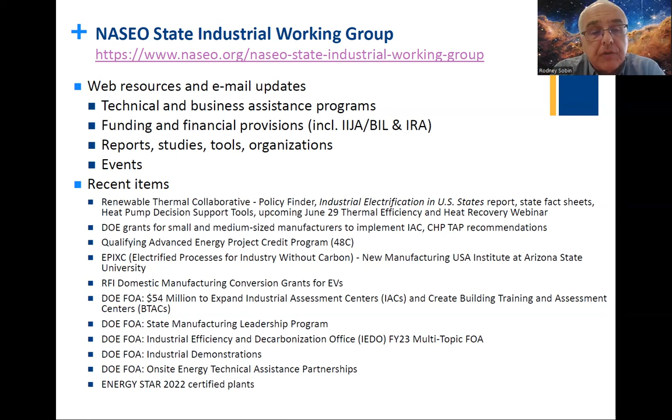Next slide, please. So we do run forums and webinars. This is a public webinar that you're welcome to. We also have state-only forums.

Past ones have included one where we focused on Connecticut's manufacturing ecosystem, as well as having DOE presentations on the Advanced Energy Manufacturing Grant Program and the Industrial Demonstrations Program.

Just last month, we had a focus on industrial assessment centers and some related DOE-supported technical assistance. We're very pleased to note that next month we will have a forum featuring the NIST Manufacturing Extension Partnership and EPA's Energy Star Industrial Program.

And you'll see there some candidate future topics, including IRA tax credits, DOE's industrial decarbonization roadmap, the DOE heat shot, and some other laws, including CHIPS and Science Act provisions which are pertinent to manufacturing. We also hope to have state focus in each of our forums, and will be working to identify state case studies, experiences, and lessons. Let me then hand this over to Blaine Collison to start off the main part of the program.

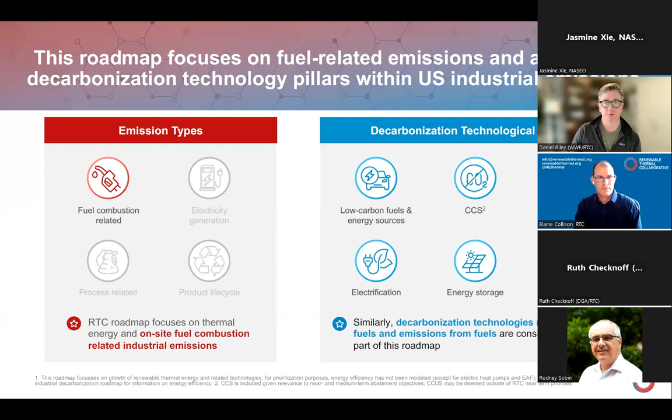In terms of the different decarbonization technology pillars: energy efficiency, hugely important, but we left it out just to simplify the modeling in terms of uptake. So you can always consider the effects of energy efficiency as you think about how strategy could be enhanced when you consider the results we show you. But we did include CCS, of course, energy storage, electrification as a strategy for scope 1, and then low carbon fuels and energy sources. Next slide.

So why are we doing this, and why is this important? I think we all know this. Industry here is 24% of total emissions in the US, with half of that coming from thermal. As you can see, there's progress, particularly expected in power generation. Transportation is growing rapidly and we're seeing a lot of work being done, but not a lot of progress in industry. You can see the uptick there. In fact, some global projections have industry by 2030 projected to be the number one source of emissions in these sector cuts. If you include the use of electricity by industry, it very quickly goes to number one globally and in the United States as well. So it's a critical part of the equation, and of course, why, as Blaine mentioned, the RTC is here.

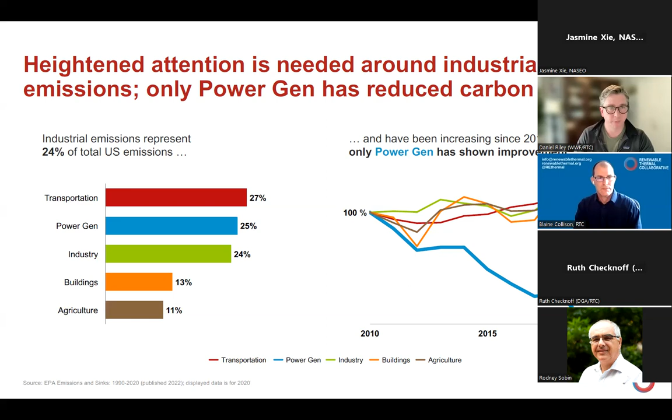Next slide. So what did we find? The first thing we had to do was understand the problem a little better. So we took a look in the US at where the industrial thermal emissions are coming from. And what we found is that the top 6 sectors are refineries, chemicals, iron and steel, food, paper, and cement. And then there's a long tail, and an even longer tail clustered together, all other manufacturing there at the end.

That box of 111, that's the unreported biogenic emissions. Those are typically accounted for as carbon neutral, but because they're biogenic, it's still a huge amount of emissions within that sector. So in the report, we offer further insights into ways of reducing those emissions, because of course they still go into the atmosphere. There are some strategies for reducing those beyond just accounting them as carbon neutral.

One of the ideas we had as we approached this is that when folks think about industrial thermal emissions, something that quickly comes to mind is the iron and steel sector - the molten orange and red metal being rolled out, and the very high heat that goes into that. In fact, that is a key source of emissions in the sector, and we know that's high heat, hard to abate - we've heard that for a long time.

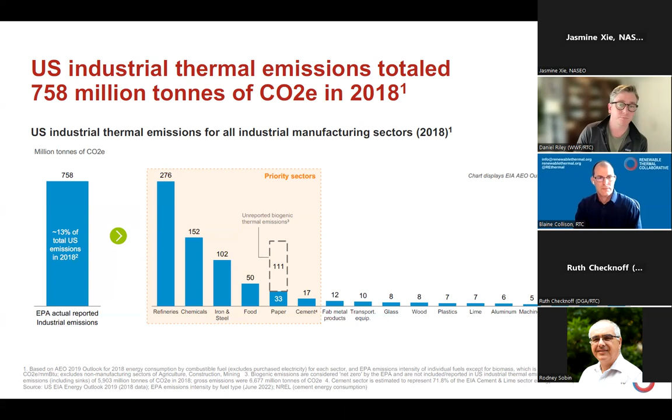What we found was a real spread - a lot of the industrial emissions were coming from, as we suspected, lower temperature industrial processes, seen here in blue, and really in the medium range below 500 degrees Celsius, seen here in orange. You can see that truly in iron and steel there's a lot of high temperature, almost two-thirds, but across a lot of these other sectors, a lot of the industrial emissions are coming from processes well below that.

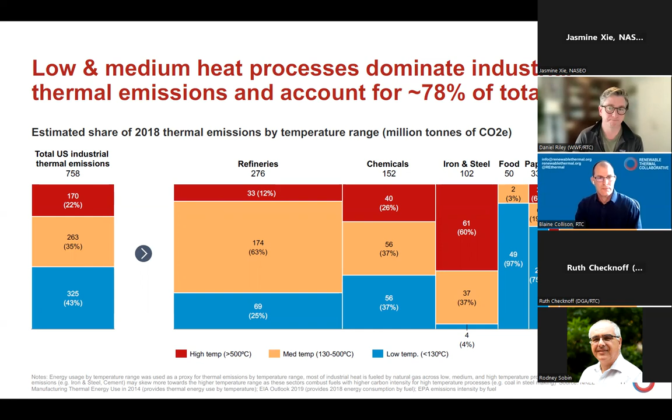Next slide, please. So here's that long tail again - things like glass and some metal fabrications require very high heat, but a lot of the rest is lower heat processes. Next slide.

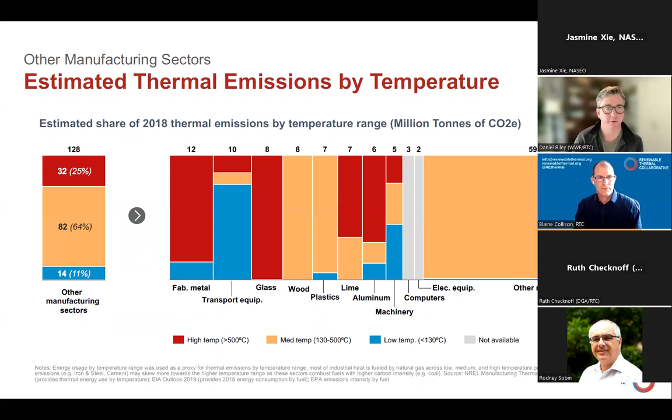If we add that up across the United States, we find that almost 80% of industrial heat is happening at medium or low temperatures, and only about 22% of industrial process requires high heat in the US. That was a bit of an eye-opener for us. What it got us thinking is that some of the technology solutions required to decarbonize industry might be available now, or might not be what is often assumed - meaning we can look for things like heat pumps, solar thermal, and storage. We don't have to wait for hydrogen or other high heat solutions, but rather can get to work more quickly.

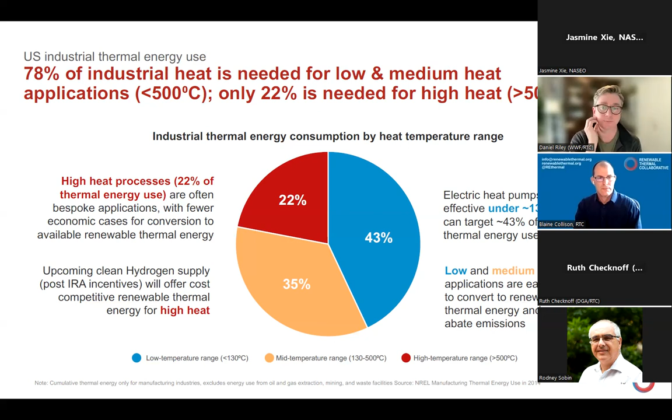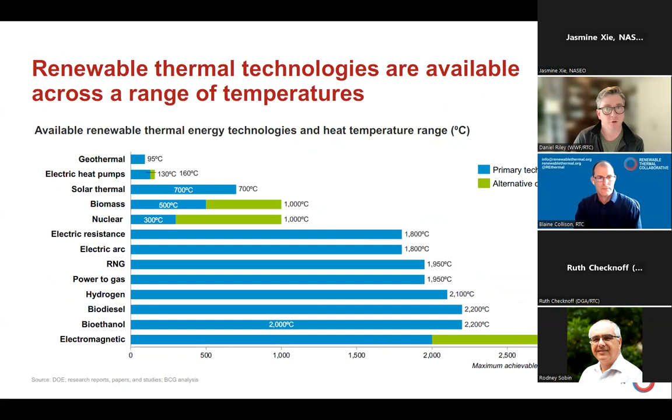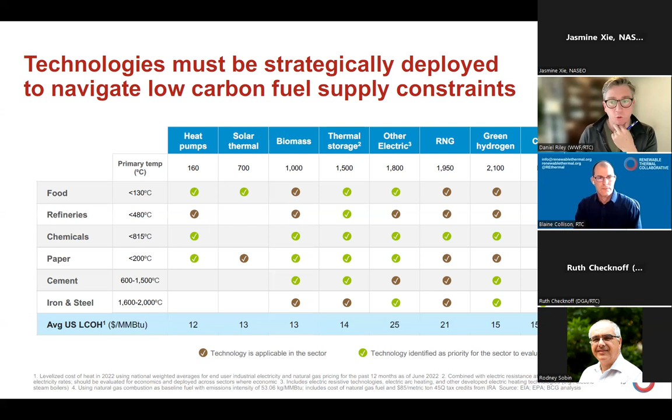For example, you could use green hydrogen, which has a primary temperature of 2100 degrees, for the food industry, but you really only needed to get to 130 degrees. So it's not the primary choice - you wouldn't choose green hydrogen because it's not as efficient. So we identified in green the options where you might be more efficient, and that might be a better choice. With that in mind, we identified technologies that were more well suited for particular sectors and more efficient. Next slide.

Next, we looked at some cost assessments and compared those to natural gas reference cost. So if you look to the far right here, you see the natural gas reference cost. This would be a range given different states, with the dashed line indicating the cost range, and levelized cost here on the left. You can also see what the cost would be with CCS for natural gas.

And then we compared it to some key technologies: green hydrogen, RNG, electrical resistance, those in pink indicating they could be used for high temperature applications, thermal storage, waste biomass, solar thermal indicating medium temperatures, with even that able to get ratcheted up to higher temperatures, and then heat pumps down at low temperature.

We also updated this and modeled in the effects, including the IRA subsidies. You can see the huge impact that has on green hydrogen, taking it down from $40 way down below 20, putting it in a competitive range. That's with the production cost reduction, which doesn't maybe fully account for all of the cost to switch. So what it shows you is that as of this analysis, you have a lot of potential technologies within the range of competitive in a range of potential geographies with natural gas.

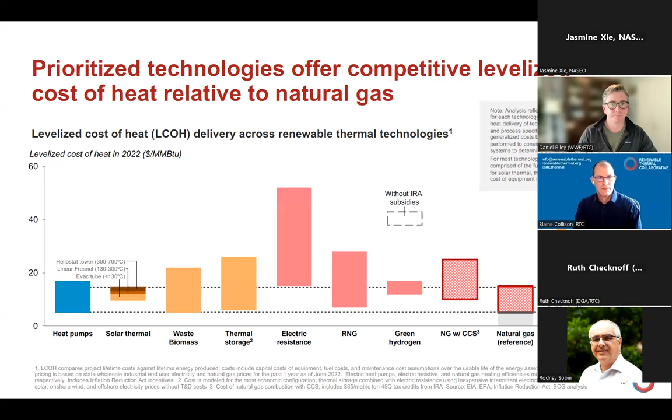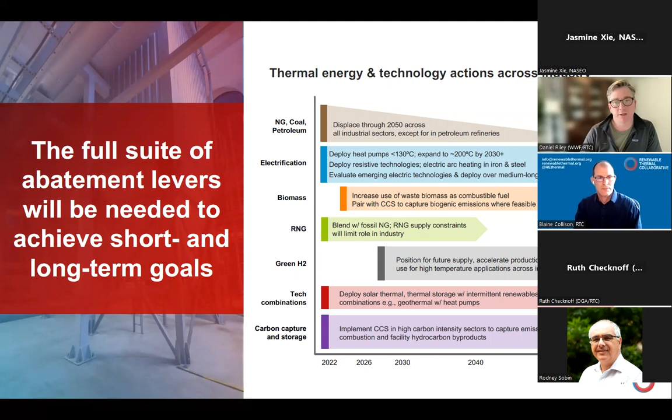And based on that, we created this stack for how these different technologies could be used to decarbonize industry over time, and the relationship they may have. So this is pretty dense. If we go to the next slide, it shows the same thing with more of a visual stack chart.

With natural gas being phased out at the top, biofuels in the red, petroleum, coal being phased out completely, waste biomass — this takes you through an aggregate of all of those sectors, their current fuels over time.

What this was built based off of was a series of specific sector stack charts and analyses. And I'm going to go into those very quickly in my last minute or so, just to give you an example of what those look like, so that when you go and download the report, you're oriented to those. So can you jump ahead a slide?

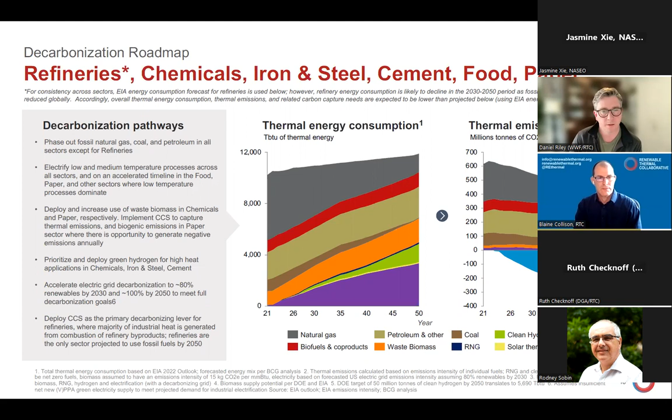Next slide. Okay, so we'll go to the next one.

So this is just a quick breakdown that shows you where all those emissions are by state — the industrial whole, for these six sectors, broken down by state, showing where they are geographically.

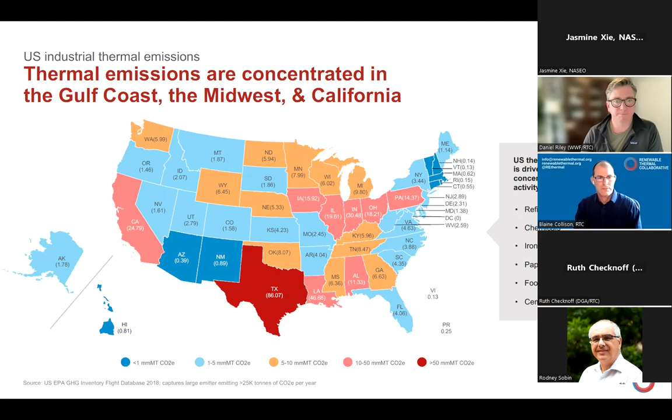Next slide. So why don't we stay here — for the food industry, for example, this is the stack chart for the food industry.

So starting in 2021 on the left, going to mid-century, you have huge opportunities for electrification in purple, growing. You have opportunities for solar thermal picking up. You have continued use of waste biomass, also eventually phasing out. You have RNG playing a big part initially in the near term. And then you have natural gas, which is predominant now, eventually phasing out.

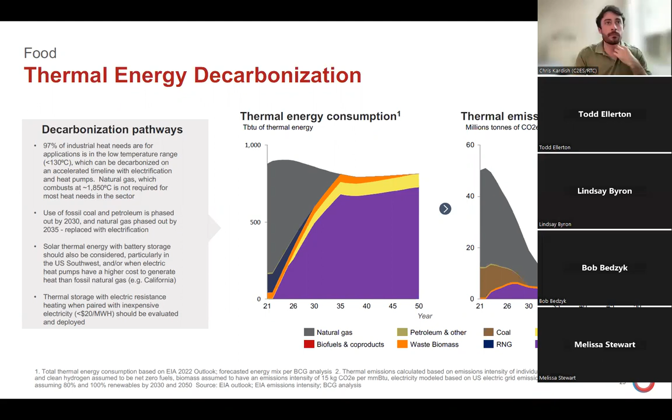This is obviously specific to this particular sector. The big story here is electrification. And then on the right side, you can see the emissions basically phasing out significantly based on that phase out of natural gas.

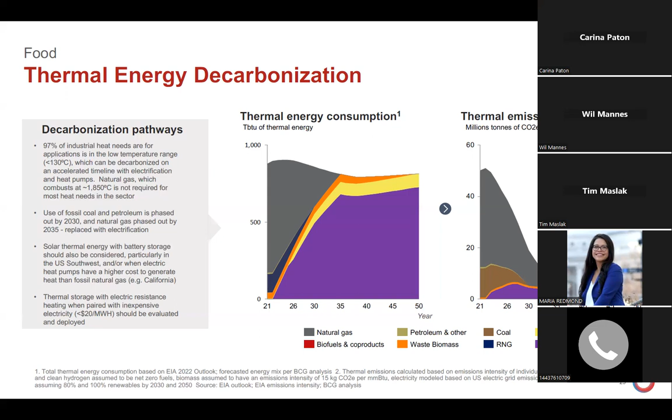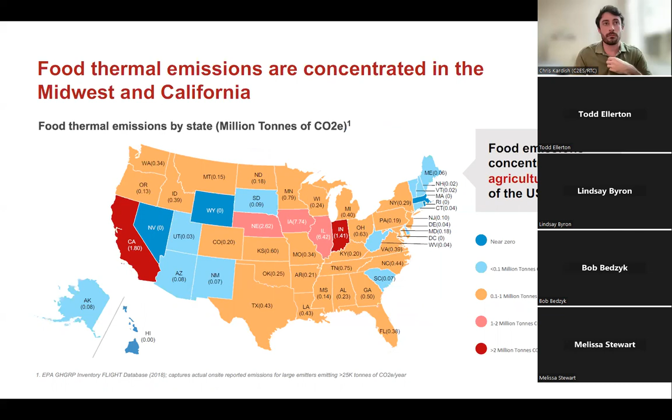Next slide. The thing I want you to note is that there are also insights based on where those emissions are by sector in the report. So you can take a look at the specific sector, say food, and how they relate by state.

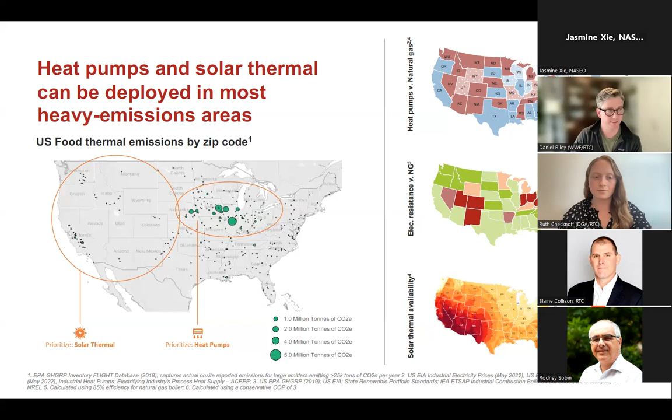And then so there's the slide deck, which has a little bit more, which we'll skip through for time's sake. But at that link which I shared is the full report, which you can download — all 200 pages, or you'll see when you go in there, you can look by sector, you can look by technology. So why don't I pause there?

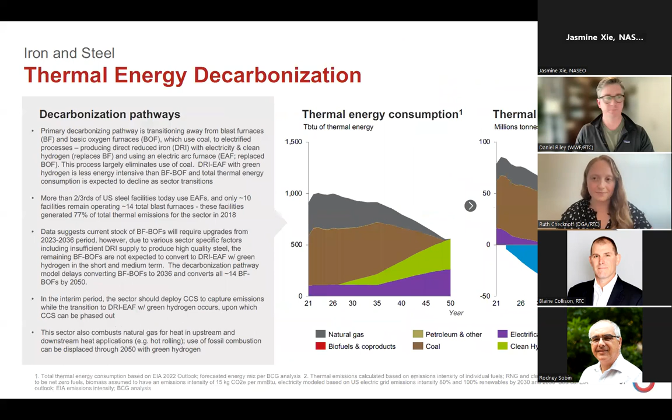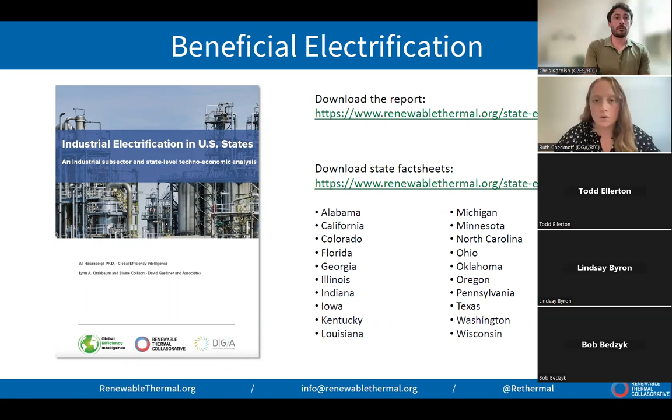This report is a follow-on to a report called Electrifying U.S. Industry that Global Efficiency Intelligence and David Gardner and Associates partnered on in the past on behalf of the Renewable Thermal Collaborative, which had an overall federal-level view of technologies for electrification across the U.S. This report goes into much greater detail on 20 U.S. states. There's the report, which is about 80 pages long with lots of graphs included, and then individual state fact sheets, which go through findings for each of the states listed here.

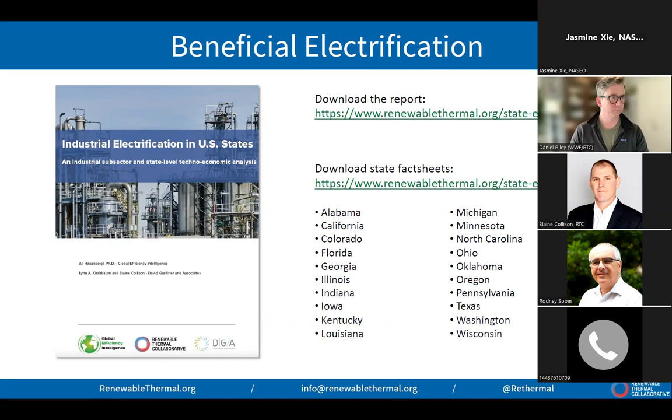On the next slide, I can give a bit more detail about how the states were selected and which ones were included. On the left side here, you can see a map of the greatest industrial energy use in 2019 - evidently Texas, Louisiana, but then other states like Illinois, Indiana, Ohio, Pennsylvania, and California use a lot of energy in the industrial sector. So this study included 18 of the highest industrial energy use states, and then 2 states that were more forward-looking in energy policies, and that's why they were included.

And then on the right side, the study really looks at how energy costs, energy savings, and emissions reductions will be impacted as a result of electrification. Key to that is the ratio of electricity to natural gas prices. In 2021, you can see the US average was around 4.5 - so electricity 4.5 times the price of natural gas on average across US states. But there are a number of states where it's below that number, so in those states electrification is more attractive. Also not pictured here, the study looks at the grid emissions factor in each state in order to understand whether there needs to be more clean electricity on the grid before electrification will produce CO2 emissions reductions, or whether it's ready now.

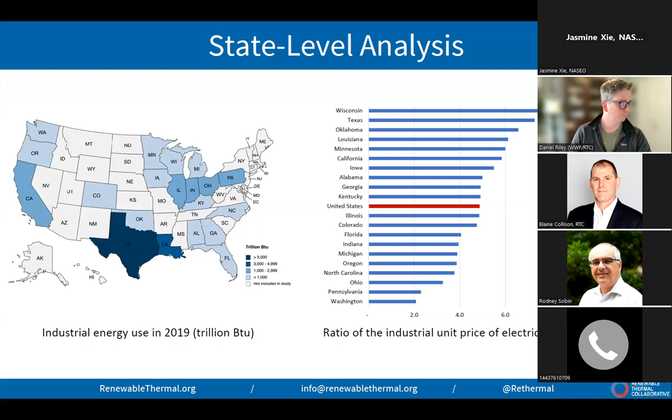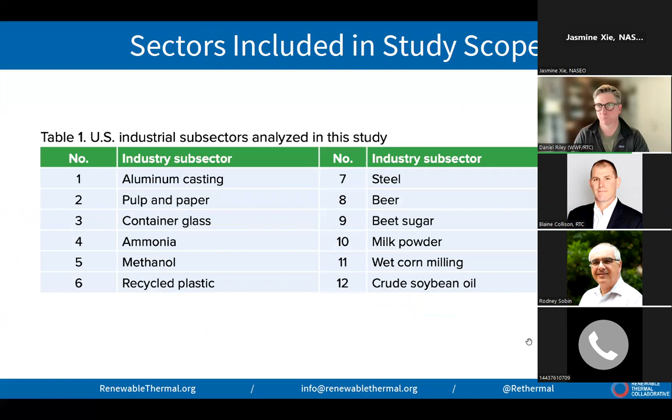On the next slide, you can see 12 sectors that we looked at. It's a mix of heavy and lighter industry. Today I'm going to give a bit of an overview of what we found in the container glass industry. Next slide, please.

Here you can see energy savings depicted across the states we analyzed in 2030, 2040, and 2050. The container glass industry switching from conventional fuels to electrification produces significant energy savings. The graph is shown in negative numbers to indicate savings in terms of total final energy use, and you can see that that's greatest in states like California, Indiana, and Illinois.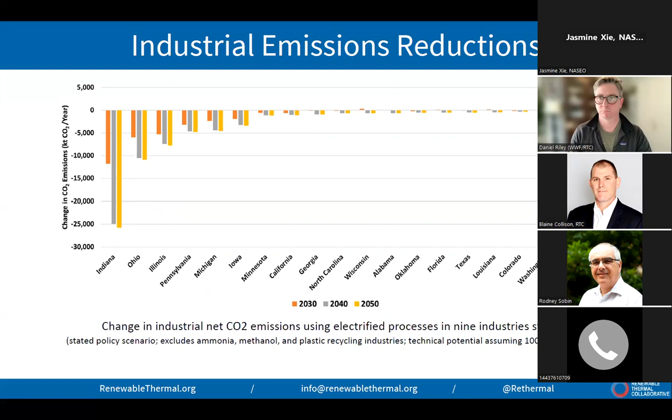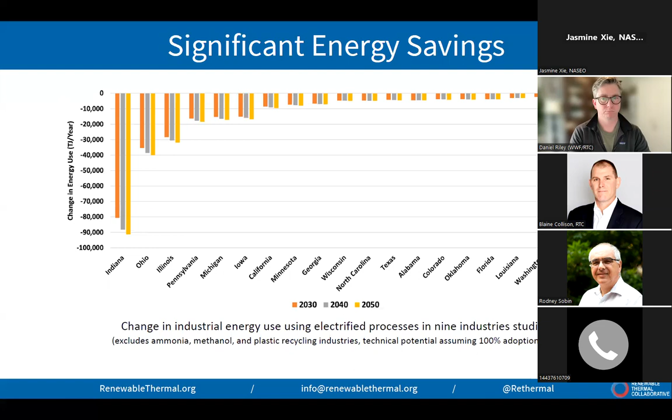So on the next slide, we can get into a few takeaways. Sorry, I think we went one more forward, please. And again. Ooh, I think we are moving backwards. Apologies. Well, yeah, here, great, thank you.

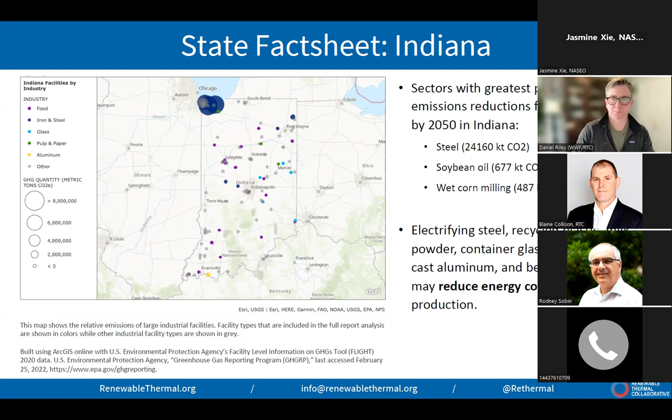So there's state fact sheets. This one shows Indiana because of Indiana's significant energy savings and emissions reductions, as well as electricity demand increases. I thought it would be great to show. This data is pulled from the EPA's FLIGHT database and has really interesting facility level data, but it shows the sectors with the greatest potential for emissions reductions from electrification in 2050 in Indiana are the steel, soybean oil, and wet corn milling industries.

And then on the next slide, I've pulled out findings for Pennsylvania as well. But you can access your state fact sheet if you're curious to see this sort of map and specific recommendations by industry online, and I'll put the link in the chat after this.

And then some takeaways, if you'll go to the next slide, please. We've already talked on all of these, but there's clearly significant potential to decarbonize U.S. industry with electrification. In many states, grid emission factors are low enough that CO2 emissions reductions can be achieved today, and that is true of more states in 2030. But we can also see plant level emissions reductions right now if there's sufficient renewable electricity supplied through a power purchase agreement or other type of behind the meter supply.

The energy cost is a significant barrier to electrification. However, as renewable electricity becomes more available and low prices are more ubiquitous, we can see that change in the economics become more favorable for electrification. And then there are also many co-benefits, including air pollution reduction, and then also certain production cost reductions.

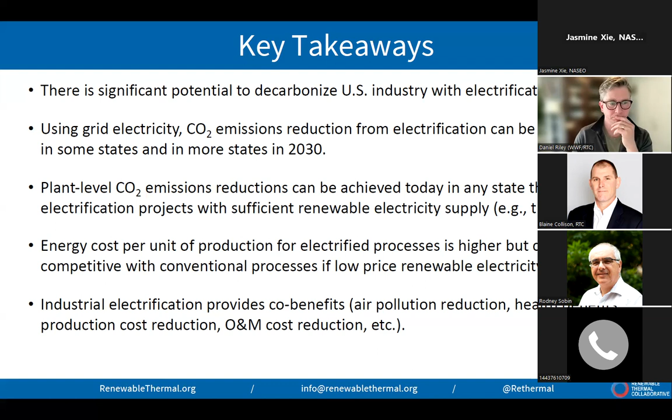And so on the next slide, and I want to get moving towards Chris's more specific insight on policy. The key message for this is that we can start electrifying now. States with cleaner grids or relatively lower electricity prices, it's more attractive. Partnerships between government and industry can help move along to develop and scale electrification. And those demonstration projects are really key to make it more available and develop the market forward. And so these 6 recommendations are fairly high level, but as the RTC continues to work through policies and other market initiatives, we plan to get more granular on this and would love to work with state energy officials to make these really applicable to each state.

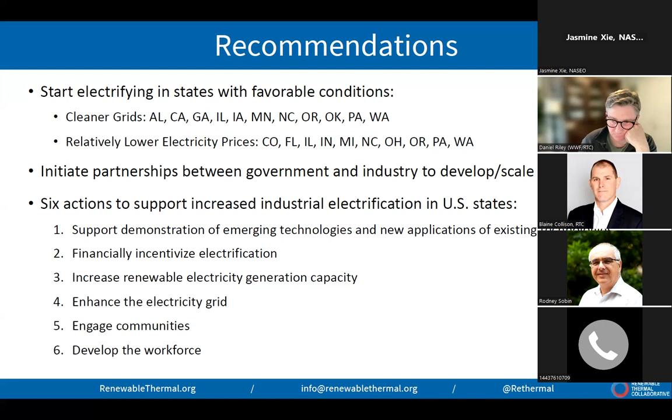Thanks, Dan, and thanks, NASEO. I'm Chris Kardish. I'm the Senior Manager of Industrial Decarbonization at C2ES. We're the 3rd co-convener of the RTC. I lost my voice over the weekend, so bear with me. I'll try to deliver this quickly so we can maybe get to some questions if there are any. You can go ahead and take it to the next slide, please.

So I'm going to dive a little bit into how we're thinking about policy, what we're exploring these days. As a starting point, it's useful to think about the specific technologies that have our attention at the moment on electrification, and that's certainly industrial heat pumps, thermal energy storage, and other electrical resistance technologies.

Dan's already alluded to that a lot, but in the case of IHPs, we're seeing a very promising technology, the low temperature applications at very high efficiency that makes it cost competitive, potentially with natural gas in a lot of places today.

Thermal energy storage is a newer technology, but very intriguing in that it can capture renewable power at lowest cost times of day to deliver direct heat or heat for long duration storage, using a variety of different storage mediums, many of them using common solid materials and at high temperature ranges, even extremely high temperature ranges, as well as providing steam at lower temperature ranges.

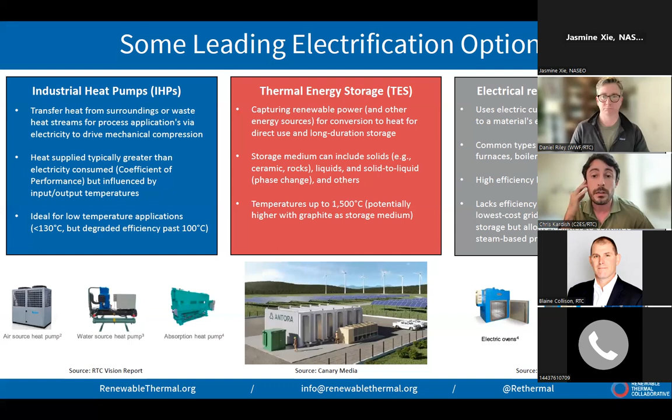Our sense of the Inflation Reduction Act at root is that, of course, it's a huge leap for US climate policy in supporting industrial electrification by greening the grid broadly, but that there are some significant gaps.

First of all, there's little to incentivize electrification of industrial end uses. For instance, there's very little in the Section 48 investment tax credit in terms of electrification technologies. The new Section 45X advanced manufacturing credit, which helps to build domestic supply chains of key technologies, largely neglects electrification technologies.

While there's some opportunity to do electrification through the 48C Advanced Manufacturing Credit and the DOE Advanced Industrial Facilities Deployment Program, both of these are limited in their overall funding and have pretty wide mandates, so they'll be quite competitive. They're not just doing electrification.

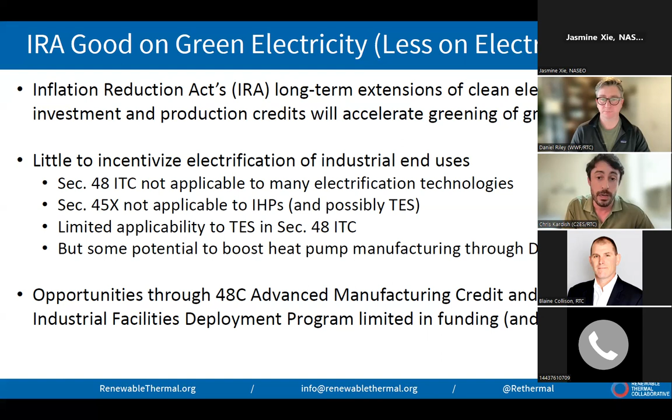At the state level, this somewhat mirrors the federal picture, in that there are limited policies that directly target industrial end use electrification, but there are certainly policies to support on-site deployment of renewables.

State governments are more constrained in terms of their level of financial support, which leads to more limited use of tax incentives, which at the state level are usually more targeted toward their state and local purview—things like property taxes and sales and use tax exemptions.

We have a deeper understanding of what's happening at the state level, in part because of a tool we developed and released this year called the RTC Policy Finder, available on our website. It provides a breakdown of policies relevant to renewable thermal across technology and fuel areas, and across different policy types, across all 50 states, and soon federal policies as well.

Drawing from the Policy Finder, specifically looking at electrification, there are definitely some trends we pick out across the main policy types in the tool.

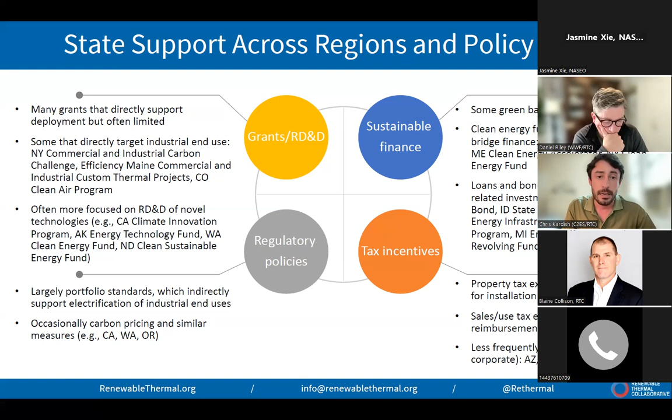So when thinking about the policies that we're really exploring right now, they tend to fall into a number of buckets. So first is expanding tax incentives federally to both build domestic supply chains and support deployment among end users.

That can be done through a number of levers, including adding industrial heat pumps and thermal storage explicitly to the 45X credit, using the 48 ITC and other ways to address additional costs that end users face in deploying these technologies.

We think the demonstrations are very much needed, including on heat pumps domestically, specifically US demonstrations, because this is needed to help decision makers in companies de-risk these investments and have a track record on which they're basing decisions.

We also recognize that we're going to need to look at barriers that are in electricity markets themselves, particularly regarding thermal storage, which will require engagement with FERC and then RTOs and ISOs.

Somewhat related will be likely needs for state level work, trying to expand and enhance performance-based rate making for utilities to allow for more competitive pricing structures as companies rapidly increase their electrical load.